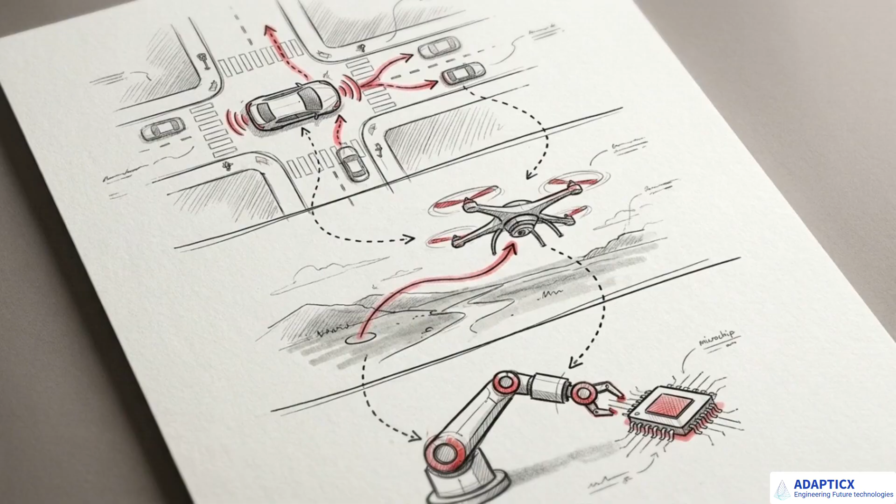At its core, reinforcement learning reduces the entire problem of sequential decision-making to a single objective. Whether navigating traffic or a robotic arm sorting materials, the agent maximizes one specific thing: cumulative reward over time, the return, or G sub t.

To calculate that expected return, agents rely on value functions. These functions act as a mathematical map, assigning a specific numerical value to being in a certain state, or taking a certain action from that state, based on the long-term reward the agent can expect to collect by following its current policy.

If an engineer knows exactly how an environment will behave, meaning they have the exact state transition probability function, they can calculate the optimal policy directly. They do this using the Bellman expectation equation. It evaluates the value of a state by looking at the immediate reward plus the discounted value of all possible future states, weighted by the exact probability of those transitions occurring.

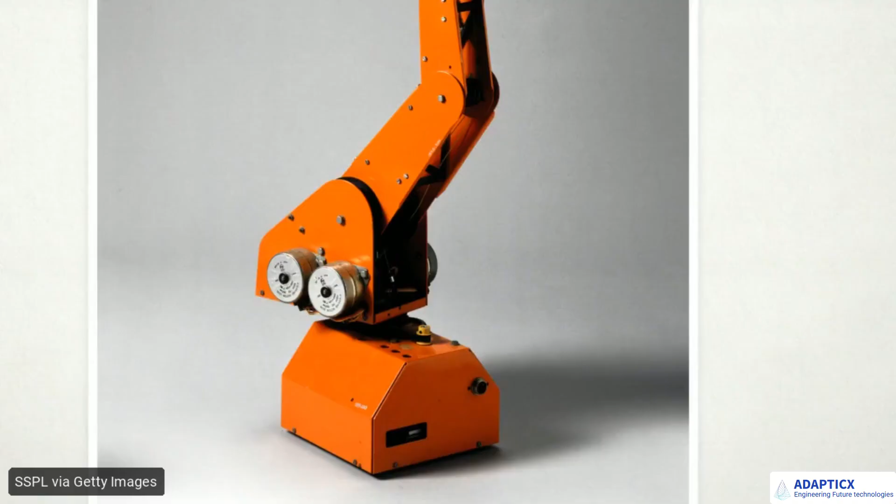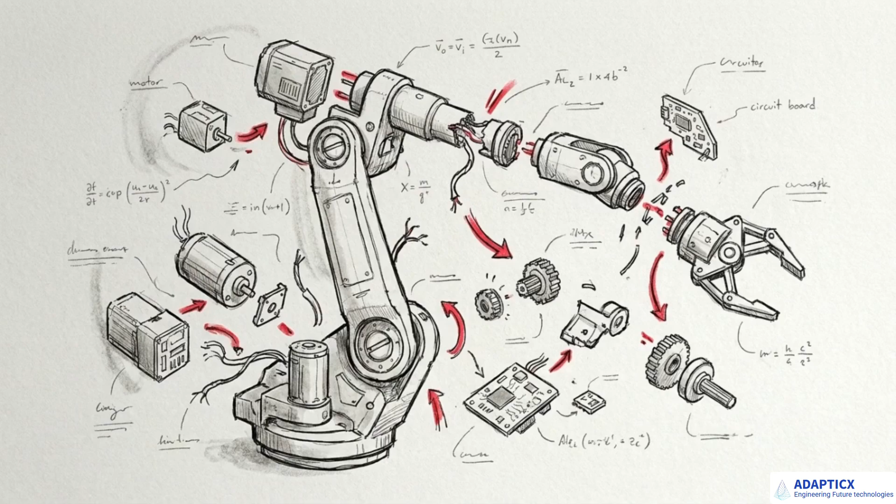But in highly complex physical systems, like a multi-jointed industrial robotic manipulator dealing with friction, payload variances, and sensor noise, possessing a perfect mathematical model of the environment is virtually impossible. Without that exact transition probability function, the traditional dynamic programming methods that rely on the Bellman equations hit a dead end. The math requires certainty, and reality rarely provides it.

This lack of a perfect model forces a specific engineering shift. Instead of using model-based planning to calculate solutions in advance, agents must transition to model-free learning. They must deduce the value of their actions purely from raw, unmapped experience.

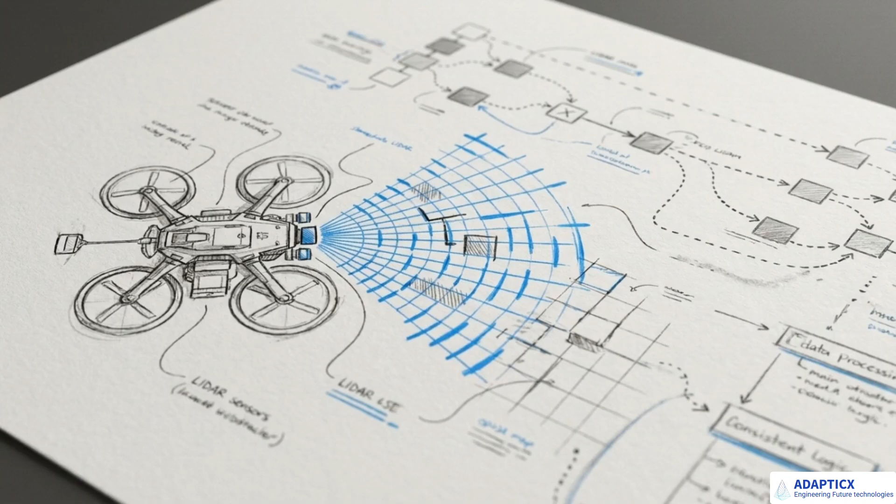The most direct method for an agent to evaluate a policy without an environmental model is simply to test it and measure the result. This is the Monte Carlo method. Monte Carlo works by having the agent follow its current policy to the absolute end of an episode. It records the true cumulative return of that complete sequence, and then mathematically averages those returns over time to estimate the value of the states it visited.

Depending on the specific architecture, engineers configure this averaging process differently. First Visit Monte Carlo calculates the average based only on the initial time an agent lands on a state during an episode. Every Visit Monte Carlo includes the returns following every single time that state is crossed.

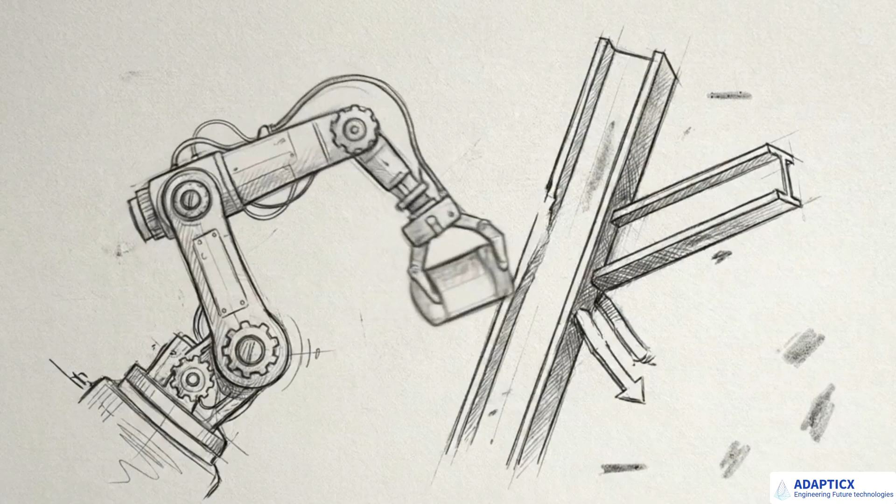Because it relies on averaging complete returns, Monte Carlo carries a strict mathematical requirement. An episode must definitively terminate before any value function updates can occur. For continuous tasks like network routing or traffic control that never actually stop, this requirement is a bottleneck. It is also a liability in physical systems, where waiting to learn from a failure means crashing an expensive robot.

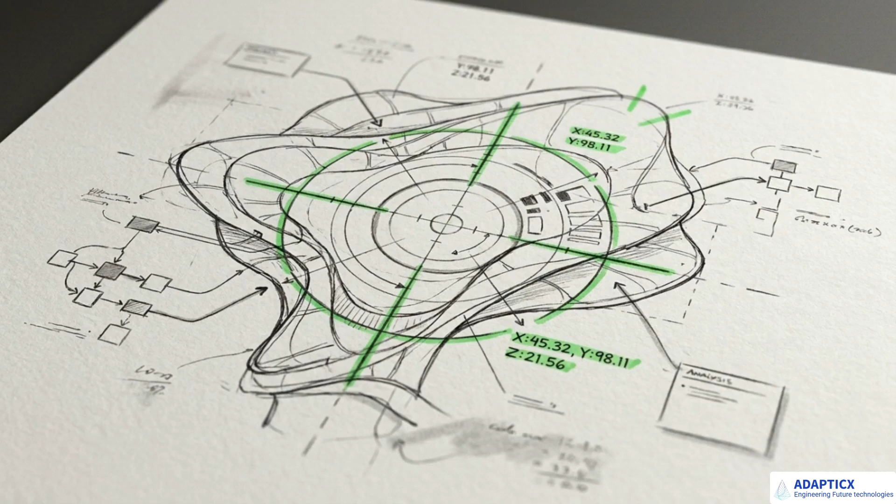Monte Carlo provides empirical, unbiased data, but its inability to update estimates on the fly creates the necessity for algorithms that can learn step by step. Temporal difference, or TD learning, solves the episode termination bottleneck. It allows the agent to update its value estimates mid-flight, immediately after taking a single step. It achieves this through a concept called bootstrapping.

The algorithm then compares this new TD target against its previous estimate for the state. The mathematical discrepancy between the two is defined as the TD error. The agent adjusts its internal map to minimize this error.

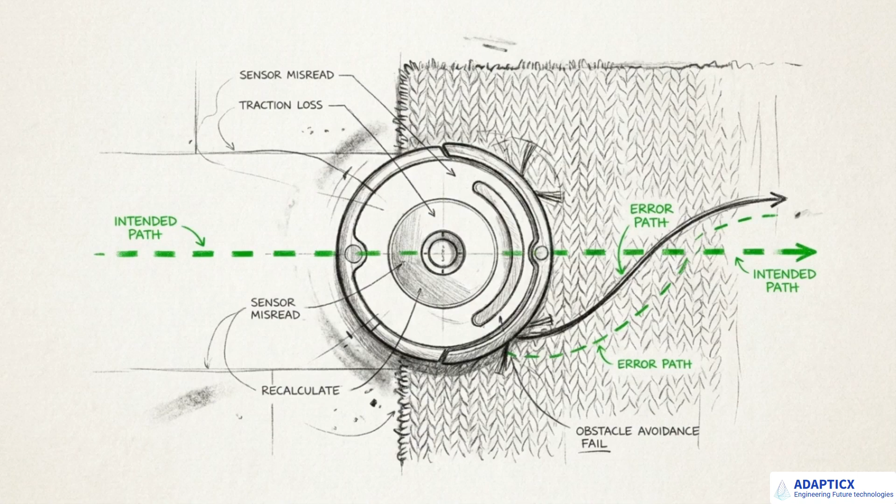Bootstrapping introduces a distinct trade-off. Because the agent is updating its knowledge based on a guess about the next state, it introduces initial bias. However, it drastically lowers the statistical variance compared to waiting for a highly unpredictable full Monte Carlo episode to finish.

By utilizing the TD error, an agent learns dynamically and continuously. It can survive and adapt in stochastic environments without having to hit a terminal state to realize it made a mistake.

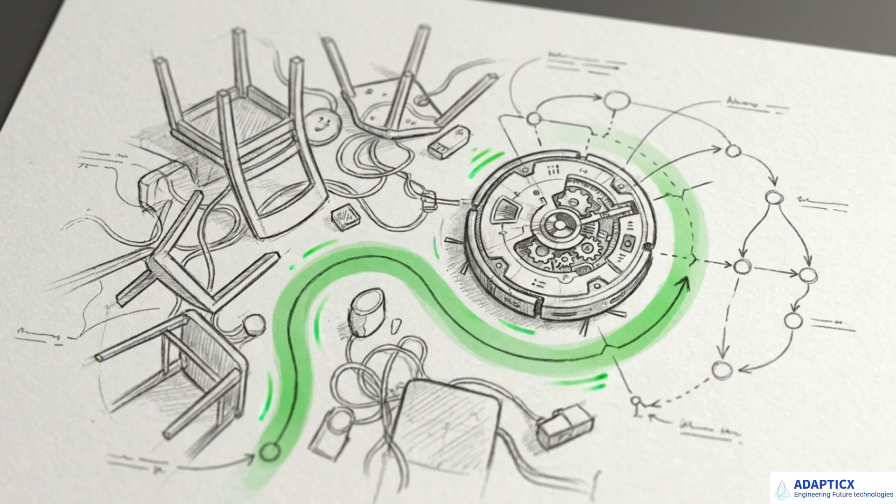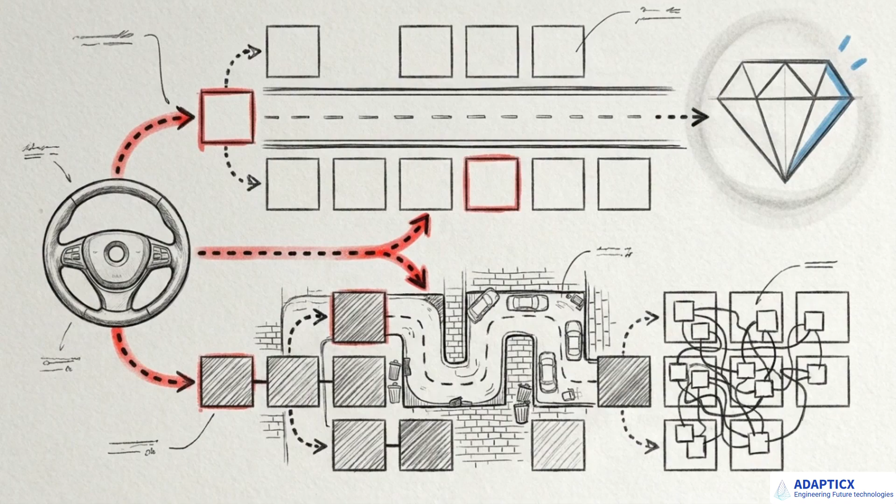Estimating the value of being in a particular state is useful, but it is insufficient for actual control. To optimize behavior, the math must shift to evaluating specific actions taken from those states, yielding an action value function. This introduces the exploration-exploitation dilemma. To discover the optimal policy, an agent must take calculated risks and explore suboptimal actions, which inevitably drags down its short-term performance.

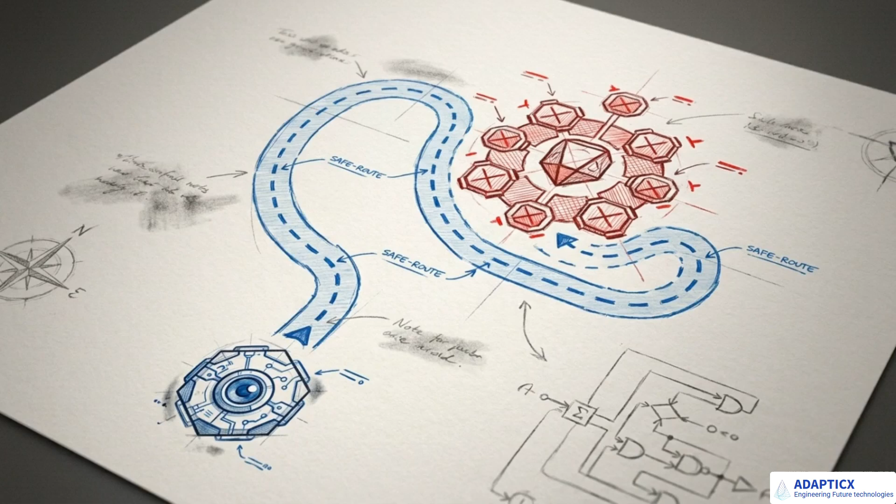This distinction matters in environments where exploration carries severe penalties. Consider micromanaging units in StarCraft. Q-learning's aggressive assumption that the agent will perfectly execute the next move can lead it dangerously close to enemy lines. SARSA acknowledges the agent's exploratory noise, leading to safer, more conservative routing. Engineers must evaluate their environment's tolerance for failure. They have to choose between the aggressive, independent optimization of Q-learning and the safe, policy-bound reality of SARSA.

While Q-learning is foundational, it has a documented flaw when deployed in highly stochastic systems. It is highly susceptible to overestimation bias. Because the environment is noisy, the value of actions will naturally fluctuate. By continuously applying the max operator to noisy data samples, Q-learning systematically picks the positive outliers, artificially inflating the expected value over time. This mathematical quirk deceives the agent. It creates compounding errors, where the algorithm locks into incorrect, suboptimal policies simply because a noisy reward spiked once.

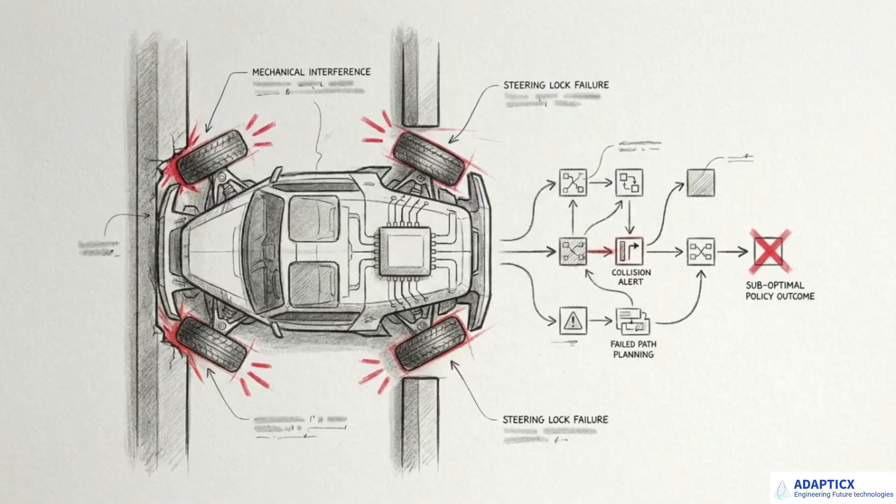To fix this, engineers deploy double Q-learning. This architecture splits the process. It maintains two separate value tables. It uses the first table strictly to select what it thinks is the best action, and uses the completely separate second table to evaluate the true value of that action. This decoupling breaks the overestimation loop.

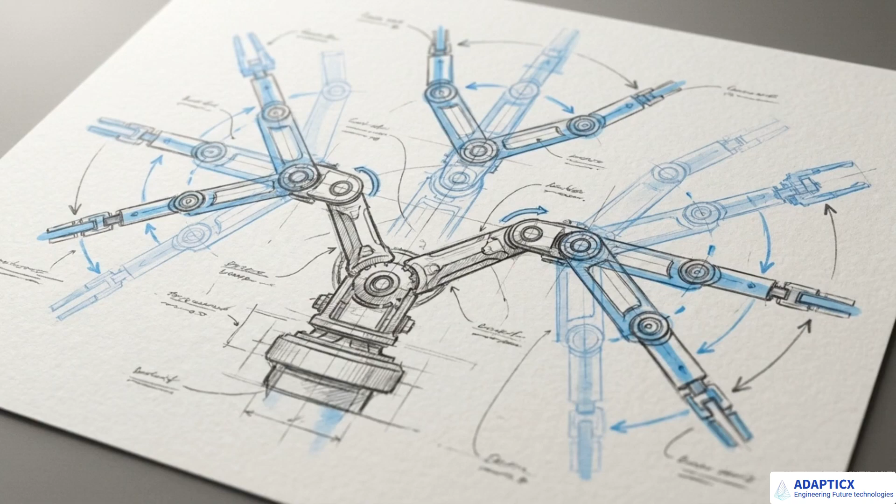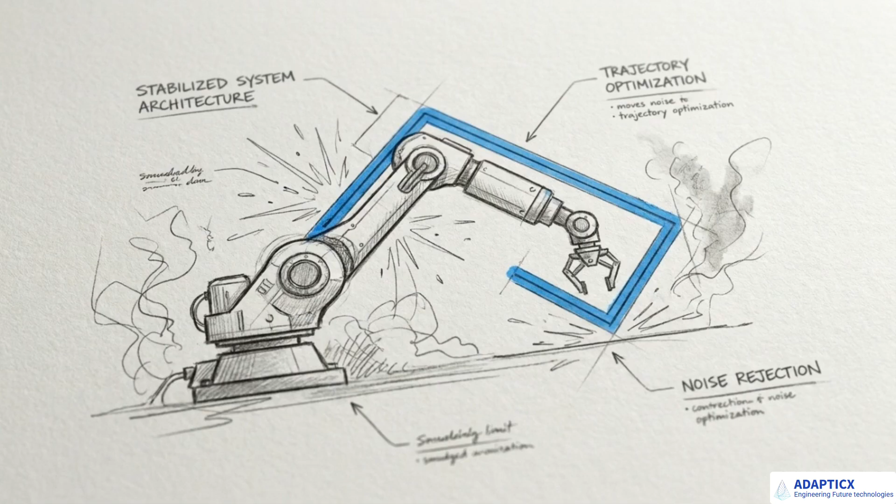If the deployment requires on-policy control, engineers turn to expected SARSA. Expected SARSA abandons the absolute max operator entirely. Instead, it calculates the expected value of all possible next actions, weighting each one by the mathematical probability that the policy will actually select it. By decoupling estimators or weighting the probability of future actions, these advanced architectures correct for environmental noise. They translate pure theoretical algorithms into stable systems capable of managing real-world variance.

There is no single universal algorithm in reinforcement learning. The architecture is strictly dictated by the constraints of the environment. If an exact transition model exists, you run model-based dynamic programming. If the model is missing, but the system allows for full, consequence-free episodes to finish, you sample data using Monte Carlo. If the environment is continuous and requires fast, step-by-step convergence without waiting for a terminal state, temporal difference bootstrapping becomes mandatory.

Within temporal difference, if the goal is optimal learning independent of the agent's current exploration, you deploy Q-learning. If the environment is highly stochastic, you upgrade to double Q-learning to strip out the overestimation bias. Finally, if the system requires safe, policy-bound learning that respects severe exploration penalties, you deploy SARSA, or expected SARSA, to smooth out the variance.

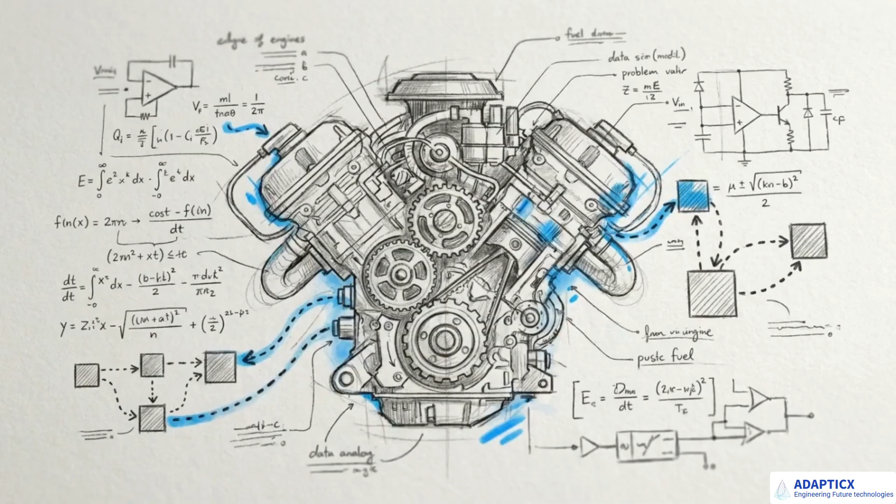Understanding the specific limitations of each algorithm, whether it's the episode bottleneck of Monte Carlo or the positive bias of the max operator, prevents engineers from deploying mathematical structures that are destined to fail in their specific operational environment. Value-based methods provide the core architecture of reinforcement learning. They are the exact equations required to translate raw, unpredictable trial and error into rigorous, optimized autonomous behavior.